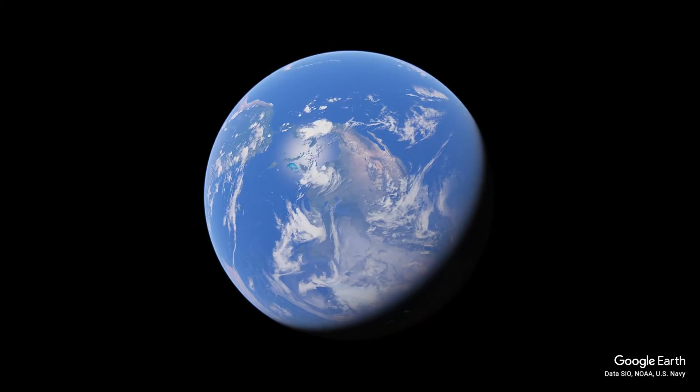Winnipeg, Manitoba, a city defined by water, shaped by culture, and rooted in over 6,000 years of history. As we descend into the city of Winnipeg, we arrive at the confluence of the Red and Assiniboine rivers, and this is the Forks, a vital community hub. Just across the Red River is St. Boniface, home to French and Métis heritage.

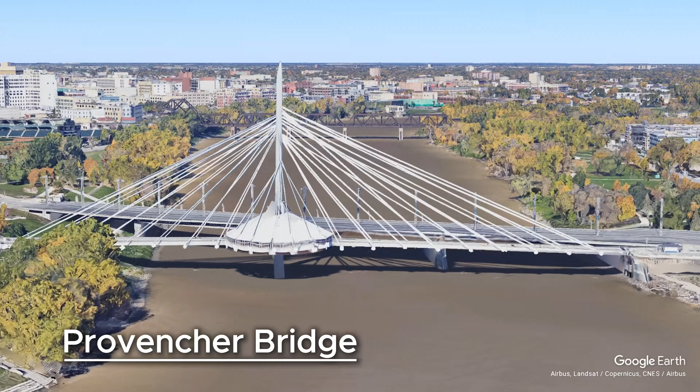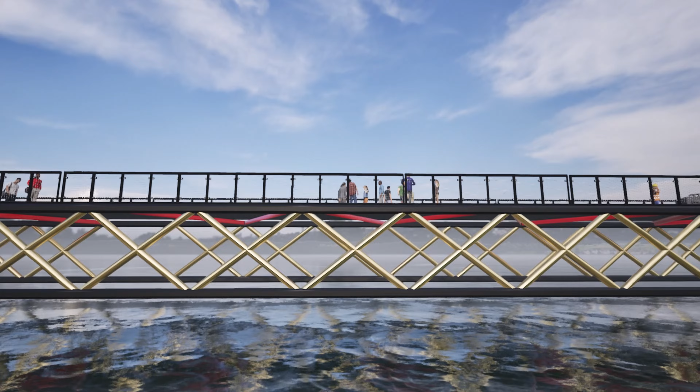The area is served by several crossings: Norwood for vehicles, Provencher for pedestrians, and the CNR Bridge for freight. But here, between two of Winnipeg's most visited places, a gap remains. To connect these two communities, a new pedestrian bridge is proposed, one that is lightweight, sustainable, and constructed with minimal impact. Steel was chosen for its strength, simplicity, and ease of construction. This is a bridge designed to leave no trace.

Over the past year, we worked as a team of 47 students to take this bridge from concept to completion. We've designed, analyzed, and fabricated the components ourselves. We are the University of Calgary Steel Bridge team. Before we begin, we acknowledge that our work was carried out on the traditional territories of the Blackfoot Confederacy and the Treaty 7 region of southern Alberta.

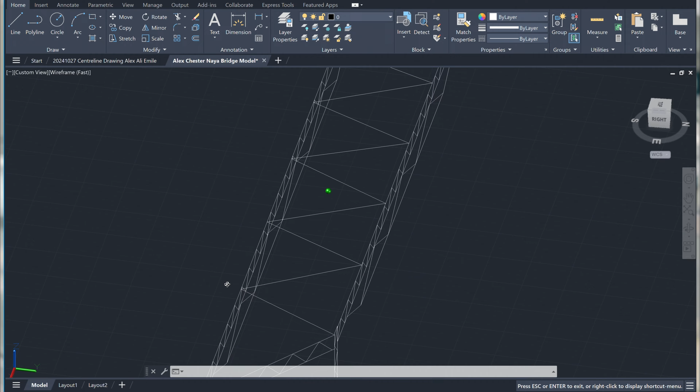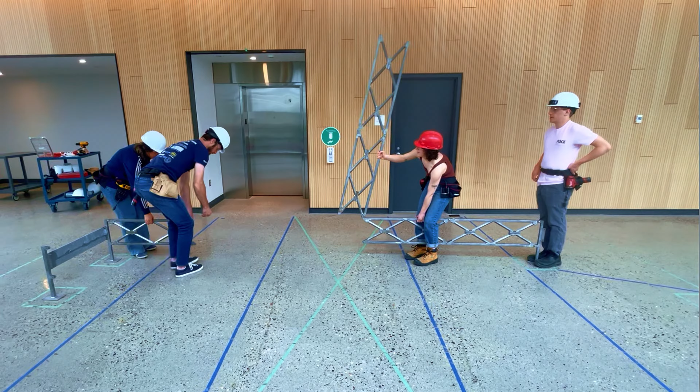We started with a broad set of preliminary bridge concepts. Everyone was tasked with exploring different priorities: stiffness, simplicity, member count, and connection style. Every step of the way, the design's geometry was refined in AutoCAD, balancing structural efficiency with practical fabrication and assembly. Each concept was checked against the competition's rules and evaluated for how easily it could be constructed. The preliminary design phase was extremely crucial to us. We filtered the most creative concept designs from the drawing board, and this laid the groundwork for our detailed analysis.

To begin our analysis, we narrowed our options to 3 top-performing truss configurations. As a sensitivity analysis, we used SAP 2000 to evaluate each design under the worst CNSBC load case and compared deflection to constructability. After consulting with RJC engineers for feedback on each preliminary design, we narrowed our bridge geometry further. The X truss was ultimately selected for its minimal sway, high stiffness to weight ratio, and clean load paths.

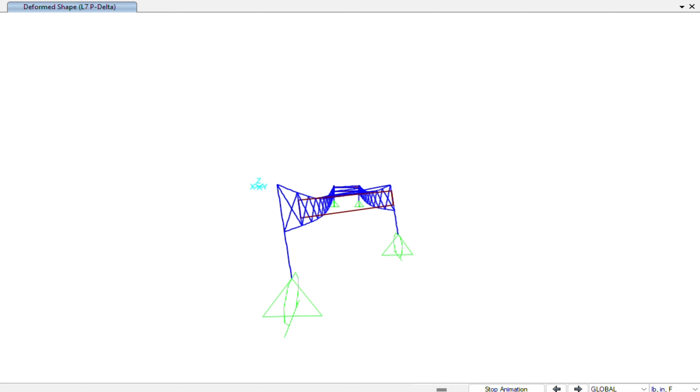Once geometry was finalized, a more in-depth P-delta analysis confirmed deflection, sway, and load distribution under each load case. Forces for each member were then exported to Excel and checked against the relevant S16-19 clauses. Final analysis confirmed a midspan deflection under 1 inch. The final bridge spans 20 feet, weighs approximately 260 pounds, and includes 41 modular steel members.

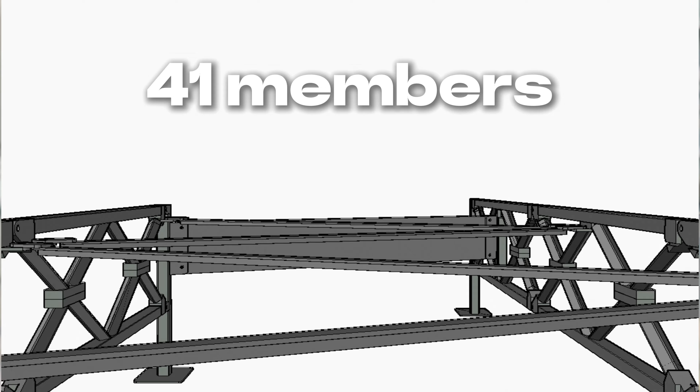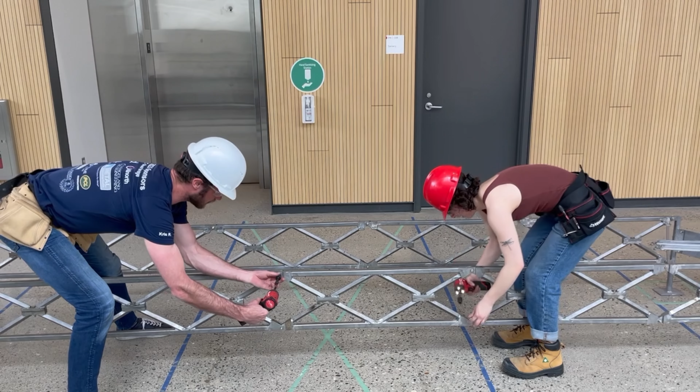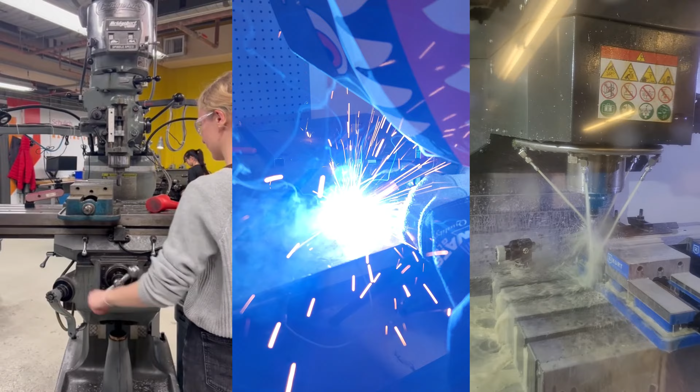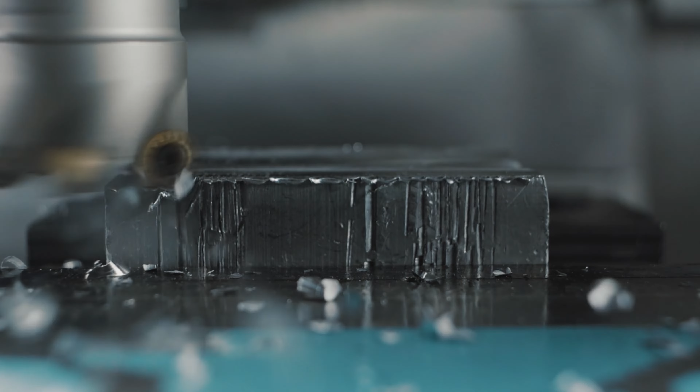We fabricated components in-house by milling, welding, CNC machining, and various other tools. From there, we designed and cut custom jigs with a water jet to make sure everything fit together perfectly. This gave us millimeter-level precision during assembly. We also did dry fits of all the members and bracing to check the alignment and make sure the bridge would go together seamlessly on competition day.

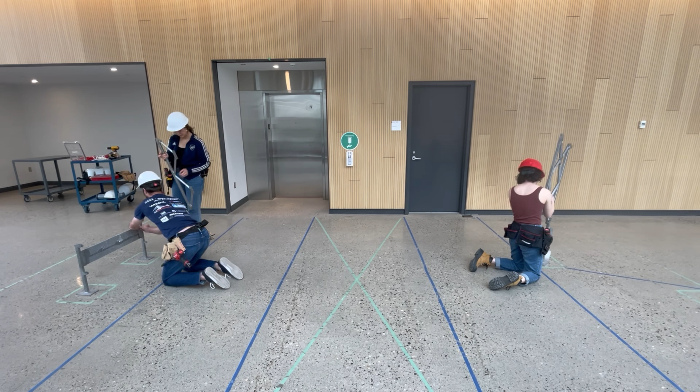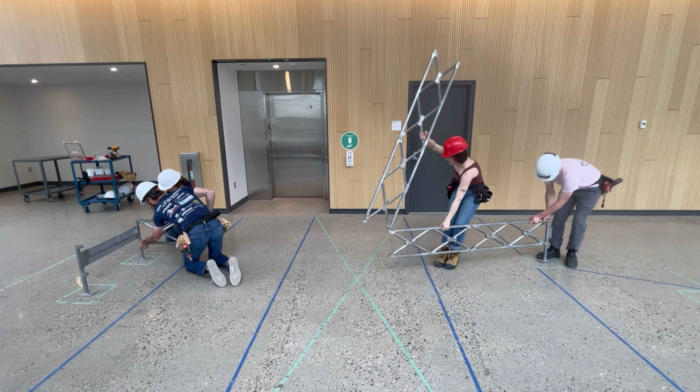Our bridge is constructed by 2 builders and 2 barges. We begin with the shorter span by stabilizing the west end by connecting plates between footings and assembling the first panel. Meanwhile, the east end progresses on 4 panels, using the rotational freedom of our connections to position and align panels smoothly. Once both sides are ready, panels are rotated into place to span across the island.

The process is repeated for the south stringer, followed by installation of lateral elements to complete the structure. We tested and refined multiple building sequences through full-scale rehearsals to achieve the fastest possible assembly with minimal crew and equipment.

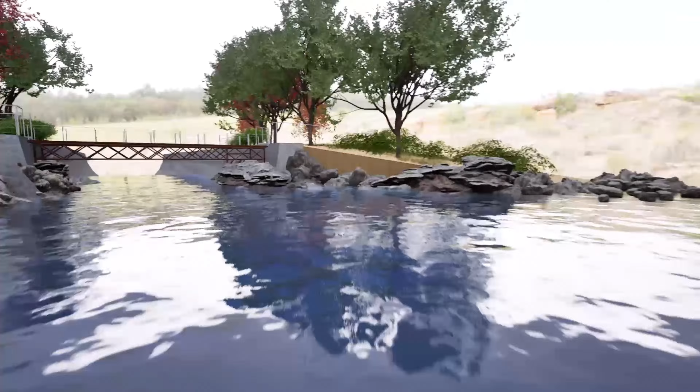For aesthetics, we use Revit, AutoCAD, and Fusion 360 to visualize our bridge design in both a structural and stylish context. Our X-truss layout creates a clean, symmetrical form that reflects strength and balance. The profile echoes the river it spans and the infrastructure it surrounds. With tight alignment, uniform spacing, and minimal visual clutter, our bridge fits seamlessly into its urban and natural setting.

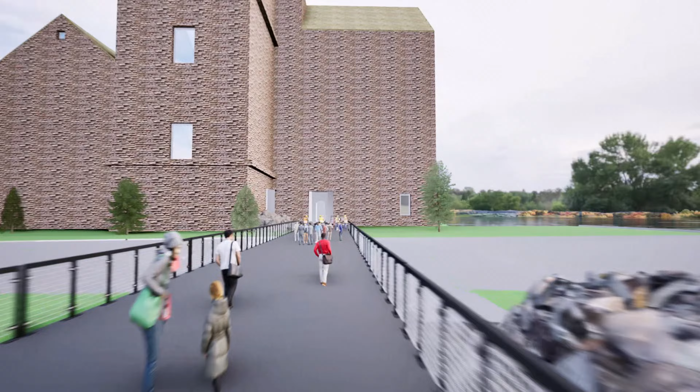Our bridge was designed with embodied carbon in mind. At just 260 pounds, we emphasize minimizing weight and sourcing metal locally, reducing emissions from material production and transportation. We reduced the number of fabricated elements and simplified the structure to decrease material use and fabrication waste. By using only what was necessary, we created a design that reflects our commitment to sustainability.

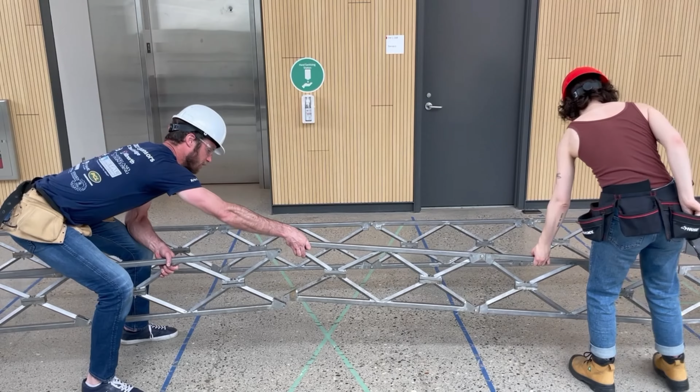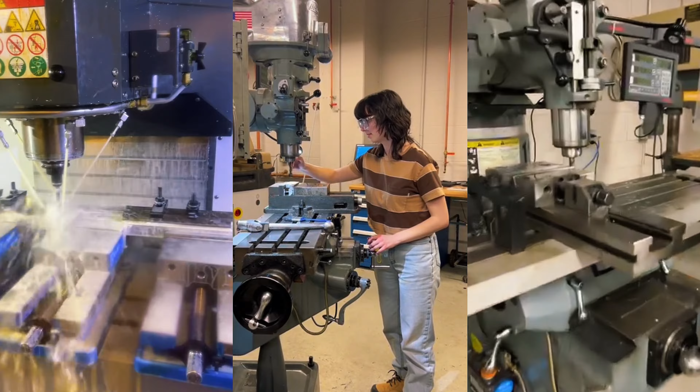This isn't just a bridge, it's the outcome of a year's worth of thinking, testing, building, and refining. It's strong, quick to assemble, easy to fabricate, and designed with sustainability at its core. We've built this to solve a problem, and we believe it's the right bridge for the site.